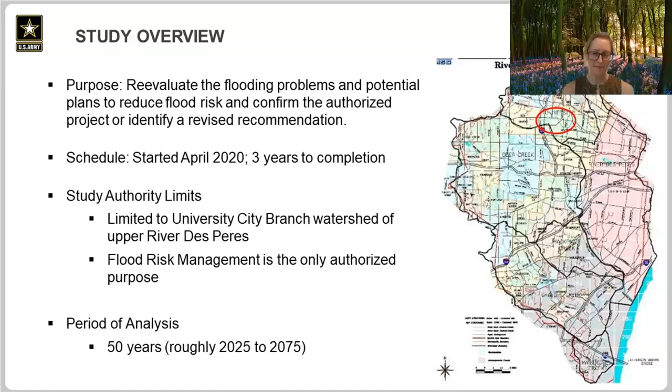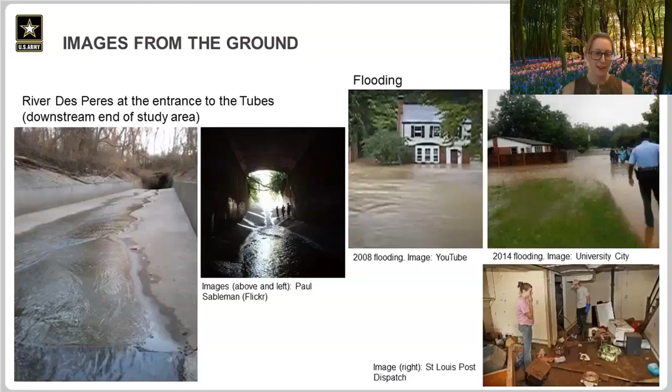I've added some images here. On the left are two pictures of the tubes, the large concrete channel entrance, and then the one that's kind of dark is the interior of that entrance with some people there, so you can see how big it is at that point. And on the right, some images of flooding in University City.

As we all know at this point, there's been significant flooding, several flood events, and I've got those listed on the next slide.

So the problems identified under the study are risks to life safety. That includes direct loss of life, flooding of critical infrastructure such as fire stations and health infrastructure, and flooding of evacuation routes so that people cannot exit from their home or business.

Secondly, economic damage resulting from the flood inundation. That would primarily focus on flooding of structures, so you have damage to the structure and also the contents and vehicles, but that can also include disruption of traffic, emergency costs, and things of that nature.

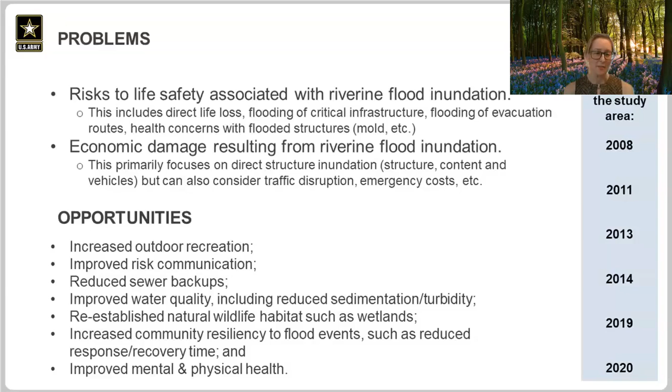The opportunities identified under the study were increased outdoor recreation, improving communication of flood risk to the public, reducing sewer backups, improving water quality, wildlife habitat, community resiliency to flood events such as reduced response and recovery time, and improved mental and physical health. For those opportunities, those are just things where as we go through, we're always trying to find ways to enhance the impact of the study and make it more beneficial.

So the objectives were down to three: reducing life safety risk due to flooding, reducing economic damage due to flooding, and increasing recreational opportunities associated with the flood features.

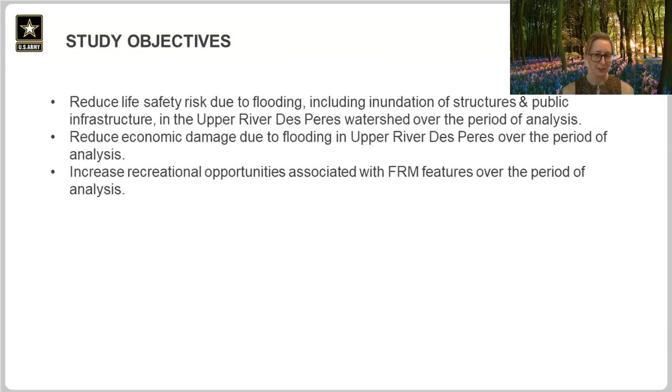We make sure to gather evidence throughout, so when new information comes to light, we continue to incorporate that. And we conduct various types of analysis.

H&H is hydraulic and hydrologic analysis, looking at flood depths and velocities and things like that. Also looking at a structure inventory of what buildings are in the area and their features, life safety risks to people, economic analysis - crunching the numbers on the flood damage - and impacts to cultural resources such as historic structures, including buildings and other structures.

After all those analyses, we create several alternatives, which I'll show you today, and then we select a plan. But of course, at this point, it's just a tentatively selected plan, not the final plan.

So we go through all these steps to get to this point, and then we go out for input, we take comments, and then within the Corps, we also have lots of different review processes outside the St. Louis district so that we get lots of feedback to refine our analyses and kind of go through the circle again and come up with a better plan at the end of it.

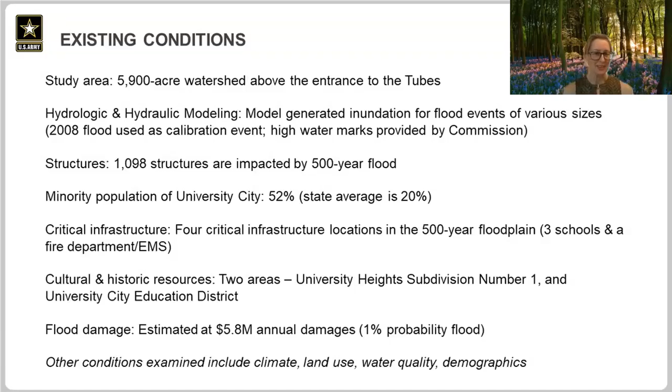So we looked at lots of other things too, and those are all in the draft report, but I didn't want to get too far into the weeds on those today.

So after looking at the existing conditions, we look at the future without project conditions. What would the future be like if we did nothing? That's helpful to compare with any future project that we propose. I've got a few things here, and again I don't think I'll go through all of them, but just to show that we've looked at several different categories and are showing changes that are somewhat significant in some cases, but mostly the watershed is fairly developed already. We're not looking at huge changes in the future, but it's good to compare against.

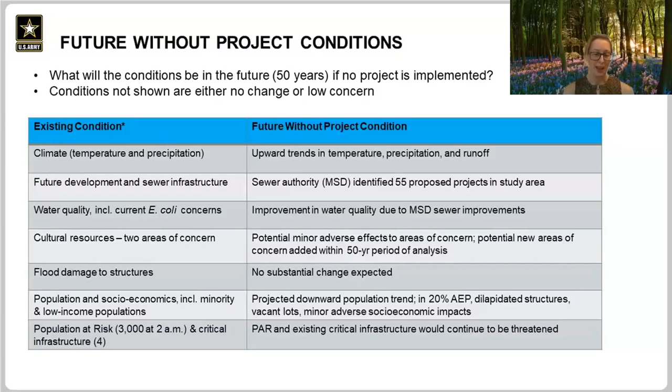Through that screening, 5 measures were removed. Then we got to formulating alternatives, which means pulling measures together in different combinations in a way that makes sense. We looked at 10 different types and screened 4 of those out, leaving us with what's called a final array, a final list of 6 different alternatives. Those are all at a low level of design right now. We start with a low level that's comparable across all the alternatives, so that we can choose correctly between them without sinking too much time, money, and effort into each individual one before knowing too much about it. Then out of those 6 alternatives, 1 tentatively selected plan was chosen.

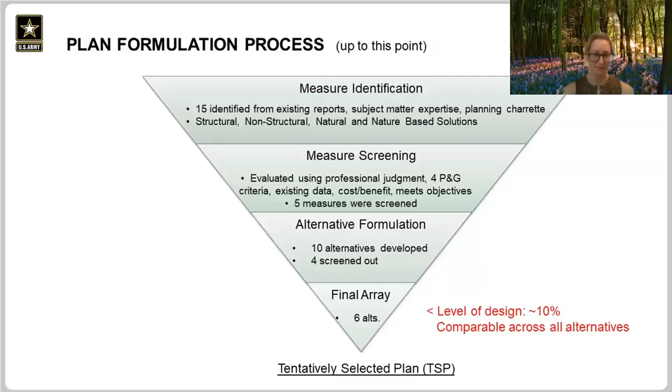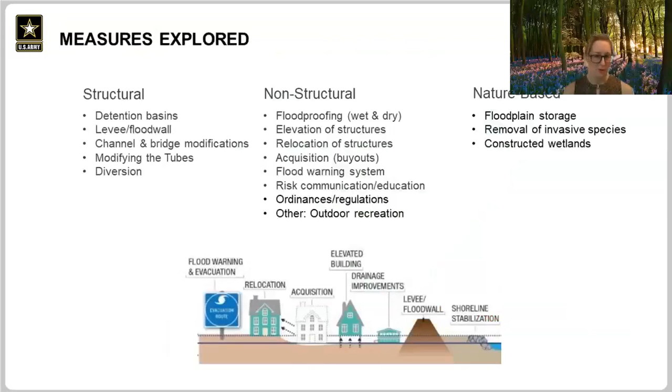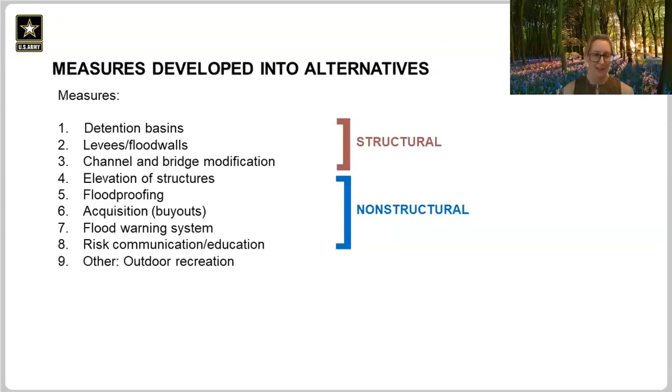So this is our list of measures. I've got a few structural, several non-structural, and a few nature-based. In the end, the nature-based ones were removed, and a couple of the non-structural and structural were removed too, to get to our final list here that were developed into alternatives. So we've got detention basins, levees and floodwalls, channel and bridge modification, elevation of structures, floodproofing, acquisition, a flood warning system, risk communication and education, and then outdoor recreation was considered as well.

Since this is a reevaluation of that 1988 report, we had to look specifically at the measures in that report. There were about 2.5 miles of channel modification, including bridge replacement, bank stabilization, and grade control. Re-looking at those, it was confirmed that the channel changes measure did cause downstream impacts, greater flooding going downstream out of our study area, so that was not acceptable.

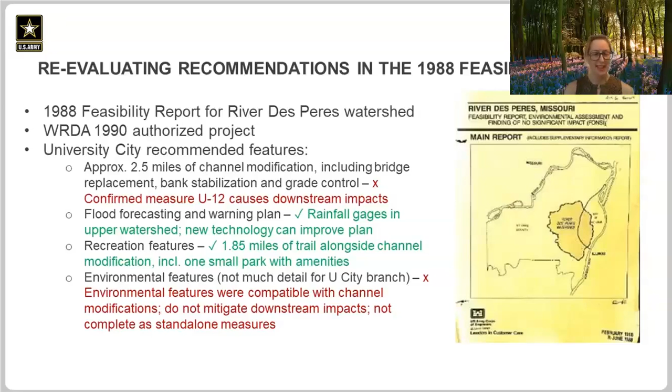The other elements included a flood forecasting and warning plan, which was fine to continue considering, as well as the recreation features. But the environmental features were tied in with the channel modifications and were not complete as a standalone measure, so we deemed those would not be moved forward.

Now I've got a bunch of pictures to give a better sense of what the measures were that we were talking about. For channel modification, this would consist of changes to the channel itself in the river, potentially making it wider or deeper, changing the shape or material, to reduce the flooding issue. The picture on the right is an older installation, a concrete lined channel behind Wilson Avenue, showing what's already been done.

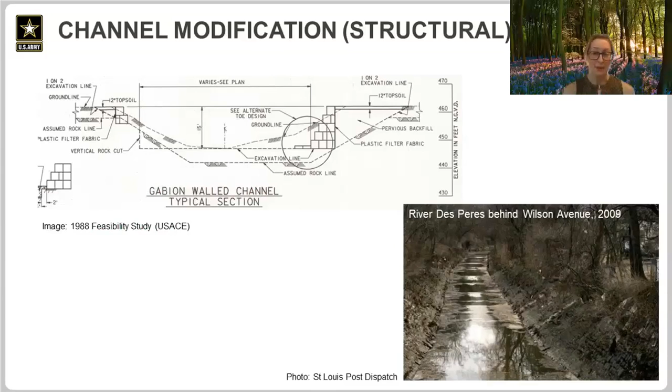Levees and flood walls. Hopefully most folks are familiar with what a levee is: a large earthen embankment where the water stays on one side and an area behind it stays dry. A flood wall is a similar concept, but it's typically a concrete structure which is vertical, takes up much less land footprint, but tends to be a lot more expensive.

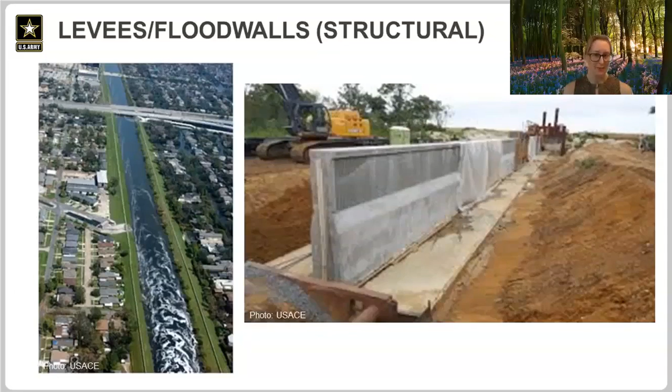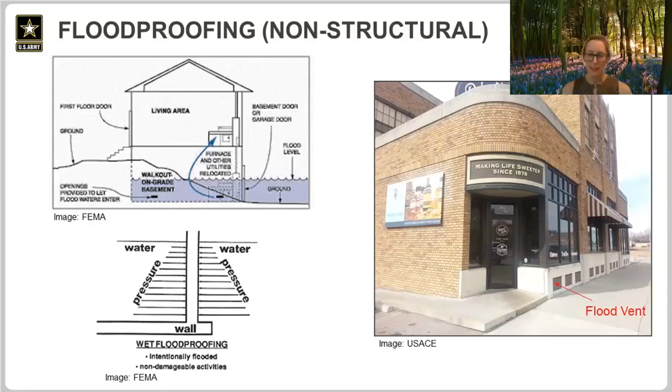For the non-structural items, I'll spend a little more time since we have a lot of detail. For floodproofing, this slide has some wet floodproofing features. The top left shows a diagram of water being allowed into the basement of a structure, that's the wet floodproofing part. Then the utilities have to be raised above the level of the flood, up into the living area, for example. The wet floodproofing will alleviate the hydrostatic pressure on the basement wall, and there's a picture on the right showing a flood vent that lets that water into the lower part of the building.

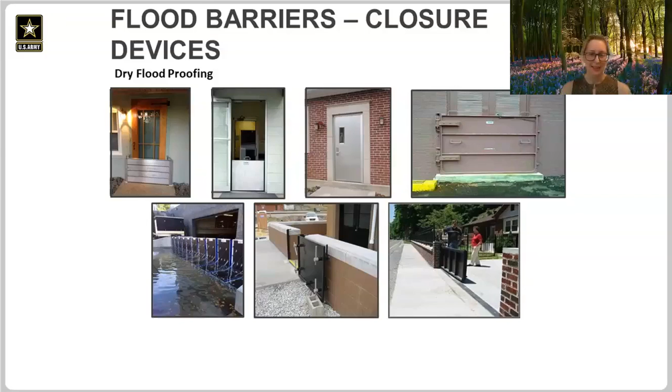There's also dry floodproofing, where a barrier could be put up actively against a doorway or window to keep floodwater out. But we know flooding in this area comes very quickly, so we have concerns about the time it would take to be warned about a flood and then have someone put something in place. So we're generally trying to stay away from active features, but there are possibly some that would be passive. This picture, third from the left on top, is just a doorway that, if kept closed as a matter of course, could be a potential passive dry floodproofing feature.

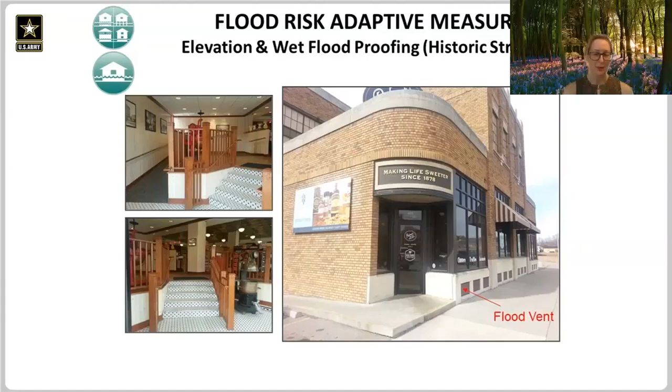One more set of wet floodproofing elements. This is the same building, but on the inside, you can see in the pictures on the left that the interior space has been elevated somewhat, so sensitive woodwork features are all on higher ground now. That can be appropriate for historic structures, to try to salvage and keep those cultural resources above the level of the flood.

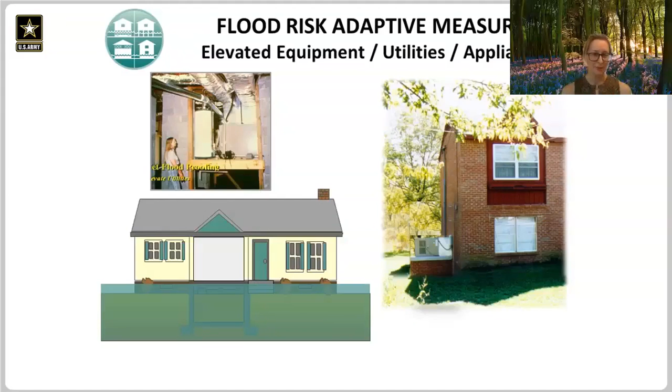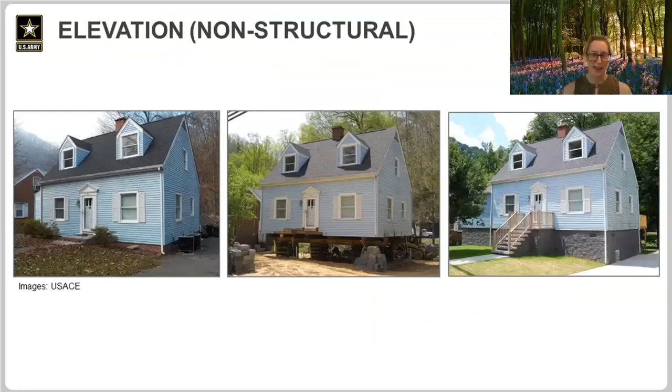Here's a slide showing some options for elevating utilities. It can be done on the interior of the home; the picture on the top left shows the utilities raised within the basement, and the picture on the right shows the utilities raised outside the home on a new additional platform. Then, of course, you can raise the whole building—this is elevation of the whole structure, where a house can be lifted up entirely on its foundation and set upon a higher, different type of foundation.

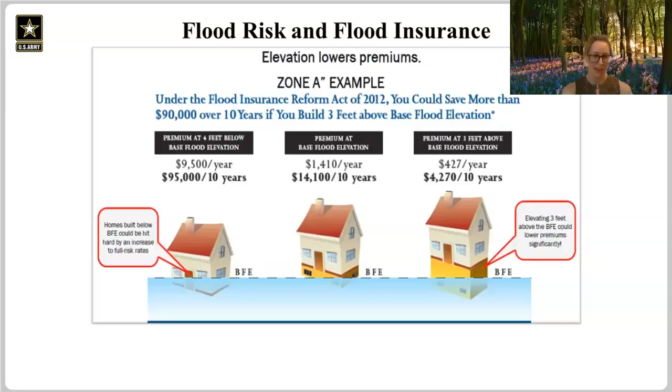Then we have acquisition and buyouts. I know this has been discussed with the city before, and a lot of people are familiar with the Wilson Avenue buyouts of those homes that were repeatedly flooded. The idea is that property that's been repeatedly or severely flooded is acquired by the city, demolished, and turned into open green space that cannot be developed further, so that any flood coming out of the river into that green space isn't causing damage to a structure or its occupants.

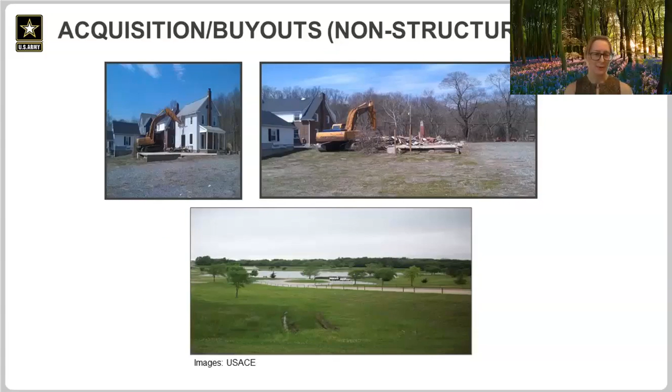The flood warning system is definitely an important feature, and the Commission on Stormwater Issues has been developing a municipal system for University City. I won't say too much since they're still working on it, but they've got a lot of data going into it, including real-time data from rain gauges. There are components that connect that data to the cloud and issue an alarm, and there's a public portal website for that as well.

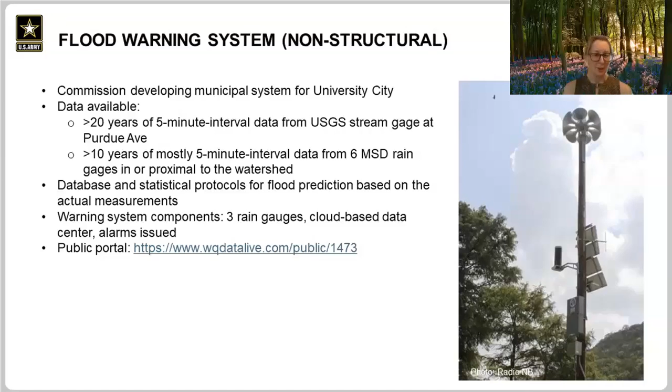Okay, so I know that was a quick run through all of the measures. I want to get to the alternatives now. This is how we got to our final array of 6 alternatives—these are the ones we developed in a little more detail. This one is the authorized plan.

That's the channel modifications from 1988 with modifications. As I mentioned, those channel modifications on their own would create a flood risk downstream of the study area that was not acceptable. So the team added 2 detention basins to help alleviate that flooding. Those are shown here in the graphic, but we'll see them in more detail on the next slide.

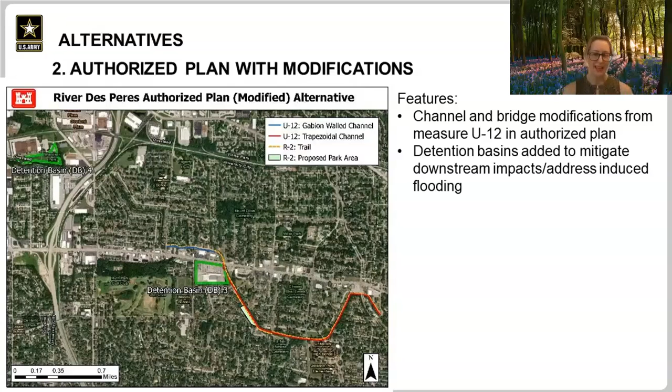For the detention basins on their own, the team looked at 5 sites initially, and 2 of those were determined to be hydraulically feasible—big enough with enough storage to really make a difference on the flood level. The greater effects were present higher upstream in the watershed, and the higher ground provided the greatest storage because you could dig down further and create that storage volume. The 2 locations that moved forward we're calling DB3, Detention Basin 3, and DB4.

DB3 is directly adjacent to Olive Boulevard, at the location of the Seafood City site and that large parking lot. It's about 15 acres in size, and it's a working space—there are businesses there, it's a high traffic area. However, it is high ground, it's a large area, and so it would provide a great deal of benefit. It would reduce the flood a lot.

Then we've got DB4, which is on the left in the graphic, and that's actually outside University City—it's within the city of Overland. It's directly adjacent to the river as well, at the site currently of a dog park at Woodson Road Park. That site is about 9 acres, also kind of high ground, so again it would provide a lot of storage. But because it's not an active business, it's a lot cheaper of a site, so you get more bang for your buck. Both detention basins are dry basins, so they'd be dry most of the time, meaning that when a storm comes in, they have maximum storage.

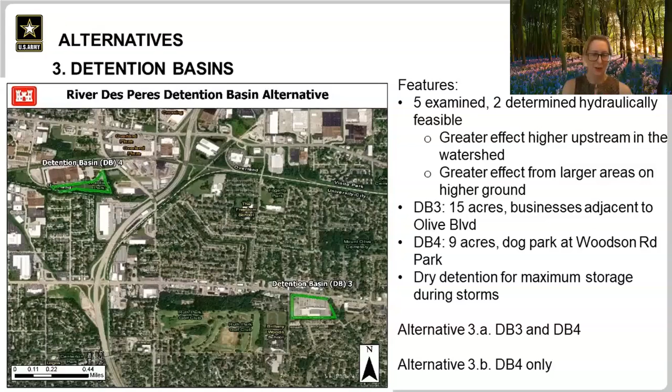So for these detention basins, we looked at 2 options: detention basin 3 and 4 together, and detention basin 4 on its own.

We did look at a levee and flood wall option, and we started by looking at a long stretch along the whole study area, breaking it up in ways that made sense. But for several reasons, it's very hard to find a configuration that really works and isn't interrupted too much in an urban area, so only one made it to the final alternative. This was Reach 2A, and it's mostly flood walls to try and reduce that footprint.

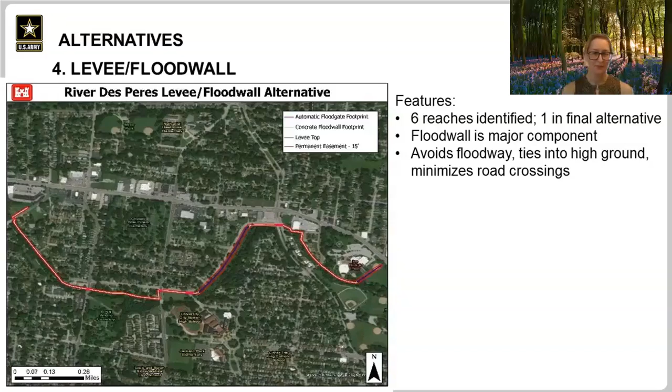Next, we looked at floodproofing and elevation of structures, a combination approach. This covers 500 residential structures in that 25-year floodplain. Most of them would be flood-proofed, and 7 of them would be elevated. We know this would affect historic structures, particularly in the University City Subdivision number 1, which is at the downstream end. Dry floodproofing was used in the analysis, but there's a lot that still needs to be worked out in terms of type of floodproofing and how that's implemented.

Number 7 looks at elevation only. So what if we didn't do any floodproofing and committed to just elevating the homes? This was developed for slightly fewer structures, in the case that no floodproofing was possible. I should also note, with these elevation and floodproofing measures, it's definitely voluntary participation.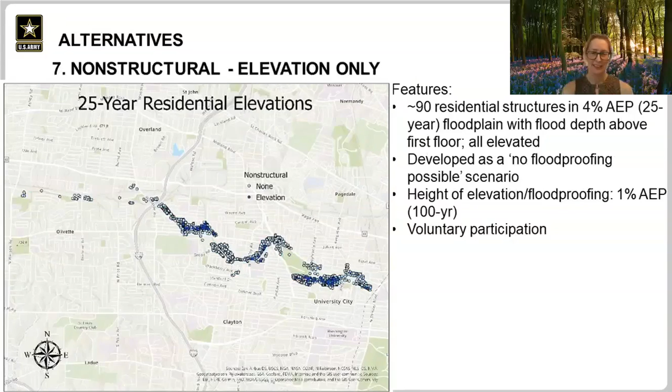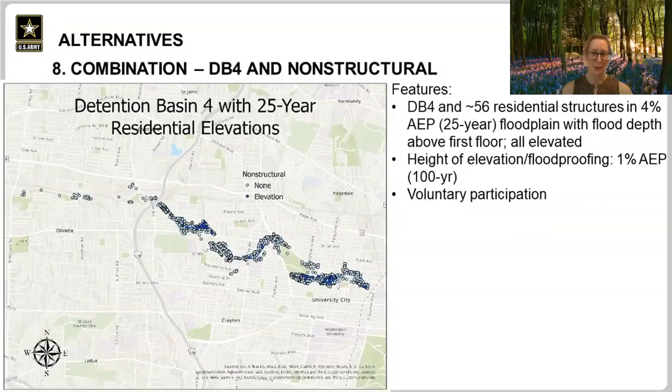And the last one is what would happen if we added Detention Basin 4 to a non-structural solution, where there's elevation and Detention Basin 4. Okay, that was a lot.

Now we're getting to how we evaluated the alternatives. I'll go quickly through this. It's a little dense, but we're required to look at national benefits, economic costs and benefits against each other, and regional economic development benefits, looking at local employment and labor income. We also look at environmental quality, impacts to threatened and endangered species, wetlands, hazardous waste sites, and cultural resources. And last but not least, other social effects, including life safety risk, critical infrastructure protected, socioeconomic consequences, and recreation.

So I've got a big table here, and I want to note again, these slides will be made available along with this presentation on our project website. I know this is a lot of detail tonight, but you can refer back to this as you decide when and how to provide any comments.

This table shows the national costs and benefits. The cost highlighted with the red oval is the one with the highest amount of net annual benefits, meaning the most annual benefit minus annual cost. The one with the highest benefit we refer to as the NED plan, the National Economic Development Plan. So by default, that becomes the front runner as we're looking at the alternatives. But with those four accounts from the previous slide, there's definitely a case to be made in any of the other categories to move forward.

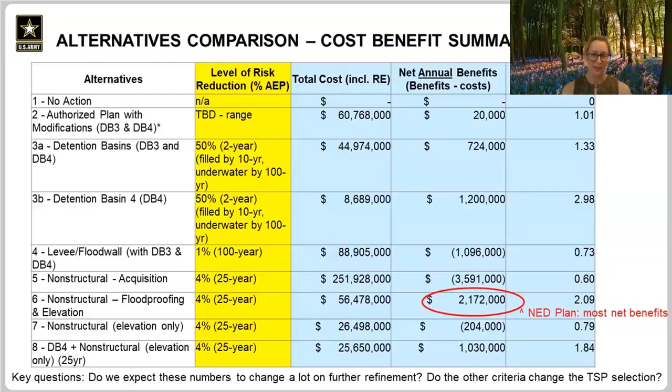So how did we select the tentatively selected plan? Back in May, we looked at those alternatives and selected the NED plan, alternative number 6, which was floodproofing and elevation—entirely voluntary participation by people who want to reduce the impact of flooding on their structure, whether it's their home or business. It had the highest net benefits and the second highest benefit-to-cost ratio. Those numbers are important to the Corps of Engineers so we can justify it up the chain and get it funded. They like to see a nice, healthy amount of benefits for a project that really provides flood risk management. So that's the one we went with—that is the tentatively selected plan.

The draft report, made available today on our website, provides details on the planning process—how we went through the whole process—and more details on all of the measures and alternatives and how those were developed. I've got a big yellow box here because, as I've said and will continue to say, the TSP will be further refined in the next stage of the study. If it's refined further and changes are made, but the city still doesn't find it acceptable for any number of reasons, a locally preferred plan can be chosen instead. The plan does have to have high enough net benefits and a high enough benefit-to-cost ratio that we can justify it, but there's a whole range of things that can be done.

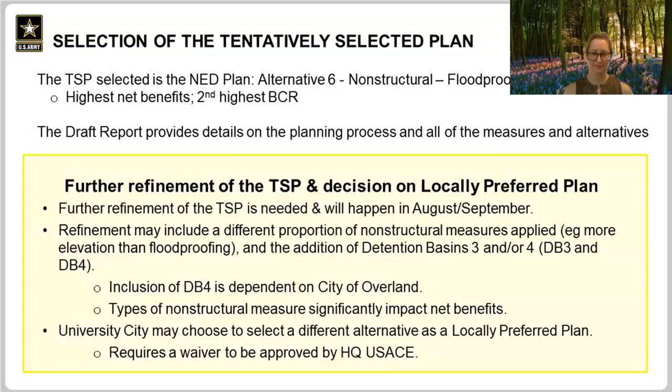Well, I don't have anything else to add. Okay, oh, is that a hand from Mr. Cusick? Go ahead. Thank you, Janet.

Before this meeting ends, Sinan, would you be able to give just a very brief explanation of the early warning system? After yesterday's rain event, could you let those people listening in know the status of our early warning system that Janet spoke about earlier?

And then, Janet, what I would like to ask you is, for those people that would like to make comments, what do you want them to comment on? What do you want them to say? What do you want to hear from people? Do you want to hear people say yes, we like detention basins, no we don't, yes we're in favor of flood-proofing methods, or no we don't. We don't want an unsightly wall down through the middle of University City to be used as a flood wall.

Specifically, what is it that residents can provide you with? Do you want information on their flooding, how often they're flooded, or where they live and if they're flooded? So could you be a little more specific on how residents could help us out with it?

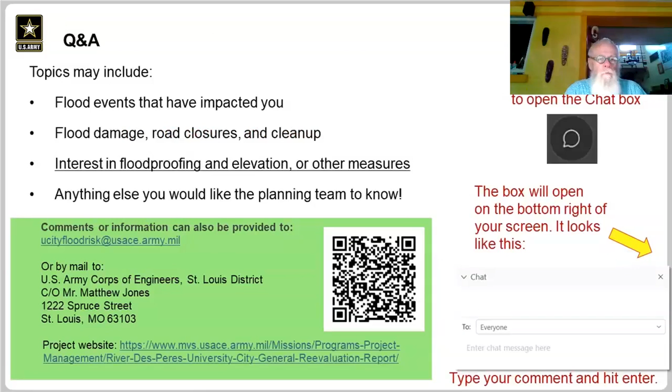Sure, that's a great question. I flipped to the next slide because I had a couple of prompts here. In theory, the public comment can include anything that the public wants us to know. And so yes, that will definitely include flood events that have impacted you. What did they look like? How often has it happened? If you're comfortable sharing your address, where did it happen? We would be very interested to know that, so that we're aware of what has actually been happening.

Flood damage, road closures, cleanup, actual negative impacts of flooding, along with dates if anyone has dates of when those things happened. I know those can stick in the mind. And then I've underlined this third point, interest in floodproofing, elevation, or other measures. So if you've seen anything that you really like in those alternatives, let us know. If there's something that you really don't like or you have serious concerns about, let us know. Really any kind of gauge of what these options have sparked for you as to what you think would work well in the community. We'd be very interested to know that.

And I might pass the mic to Matt Jones in case I'm missing something as a prompt for public input. So Matt, did you have anything that you would add to ask for specifically? Yeah, thanks Janet. I would definitely agree with everything that you said, and I would also add, if there's something that motivates the public and that's really what they want, we would really like to know that. So for example, if all of the residents are concerned about reducing their flood insurance or potential flood insurance, that's really important because that lets the city know, and the commission know, and then us know that we need to really use measures and identify measures that will do that, because not all of them will do that. So I think knowing what really is important to the public is important for our study process, as well as for the elected leaders who will ultimately have to make decisions about whether we move forward or not.

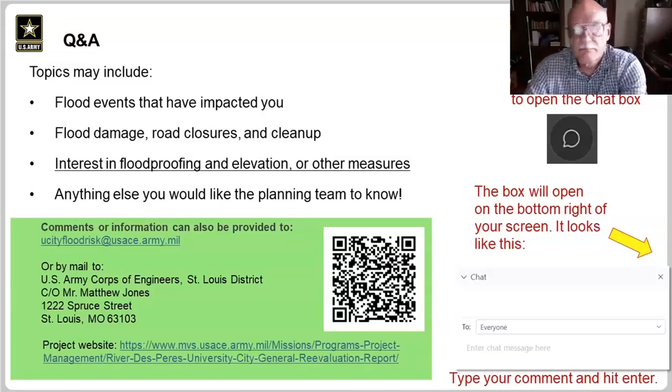So the next question, Sinan, this might be something you wanted to address: what has been the investment or total expenditures made by the City of University City, directly or indirectly, to the Army Corps of Engineers? The Army Corps of Engineers' proposal fee for this study is $650,000, and that has been fully paid at this point, which will take us through completion of the study. That is funded by MSD's operations, maintenance, and construction improvements funding in our community, so we get reimbursement for that expenditure from MSD. Additional staff time, commission's time, and our council's time are additional investments into this undertaking.

Yeah, for sure, Sinan. Just to build on that and explain what it looks like in the grand scheme of things: the $650,000 you referenced gets us to a complete feasibility study, and within that feasibility study are some preliminary construction costs. Once the feasibility report is finished and goes through all its approvals through the higher level Corps of Engineers, assuming that gets approved, then we put in a request to Congress for additional construction funds. We then enter into an agreement with the city whereby we build the project, cost-shared between the Corps' federal dollars and University City's dollars, or however the city chooses to get those funds. I just wanted to add that overview of the process.

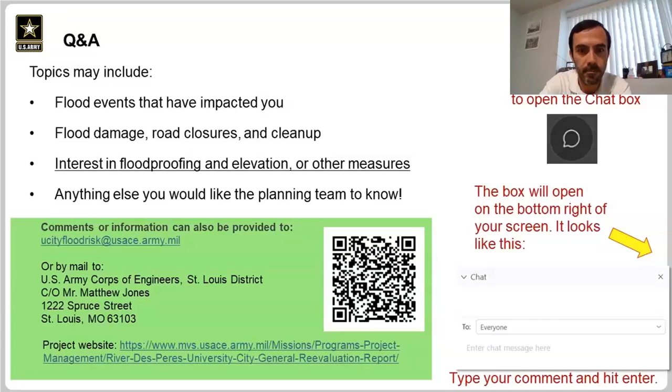Alrighty, the next question was: have you completed studies above the University City watershed that flow into University City? Doesn't that have a big bearing on what our plan would be or should be?

Yeah, I'll take that one. Clicking on the study area slide again, the watershed boundary, like I mentioned, is this red line. It does extend up into Olivette and Overland, but it's just this area, the upper headwaters of the river. The green dot on the left side of the screen marks the 800 CFS threshold. By statute, we're required to cut off looking at waters that are too small, and that's the cutoff point, the upper end of what we're looking at. I just wanted to show that this map represents the upper end, so we're looking all the way up to that green dot and the drainage area there.

I'm not familiar with any other studies that have happened before now in that area. As I say, it's the upper headwaters, so the tributaries are all pretty small, and there's no studies available above that point. So that's the short answer.

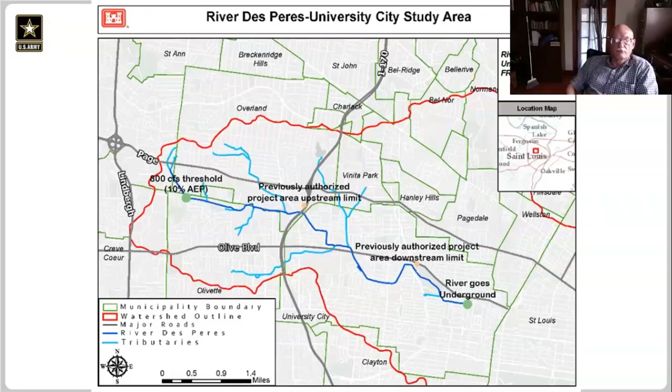Okay, thanks Janet. There was another follow-up question to my funding response to myself and Sinan, so I wanted to touch on that really quick. How are we planning on paying for the construction, or will it cost us more money? Can you give an idea of the cost share for other municipalities?

So for this particular project, if it were to move to construction, construction costs would be cost shared 65% federal and 35% non-federal. The actual dollar amount would depend on what the ultimate recommended plan moving forward is, whether that's the LPP, the current TSP, or any variation. I just wanted to provide that - that is the cost share. It's pretty typical with these flood risk management studies, where 65% is the burden on the federal government and 35% on the non-federal sponsor.

As to how University City would pay for that, that's not something that I can answer. But Sinan, I don't know if you wanted to touch on that at all, any kind of revenue source for construction on the city side of things.

Not determined so far, but we're anxiously awaiting the results from this study. And however, 65% federal participation is, I believe, a good way to leverage our local funds for a construction project that can address some of the flooding issues in our community.

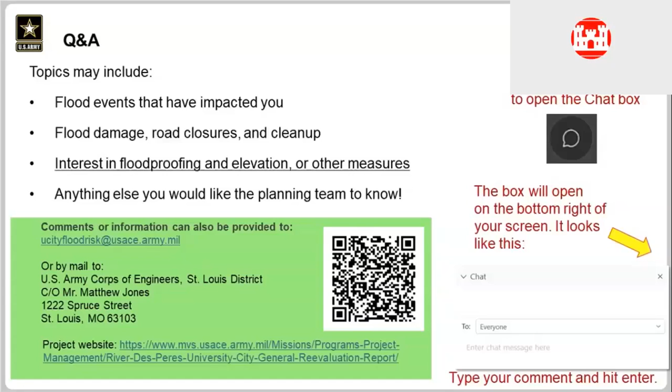Janet, I'm not sure if you're able to answer that, because I'm not aware of the MSD tanks, but if you don't, maybe Sinan could jump in, or someone from the commission. Well, I'll start by saying - go ahead, Sinan, go ahead.

Sorry, Janet. The proposal came to University City a while back, and there was a location considered for it, and they collected public input. Based on my memory, it was a proposal that was withdrawn by MSD at the time. As I understand it, it's geared toward solving combined sewer overflows into the River Des Peres. MSD is under a consent decree to solve those issues in their service area, which includes University City. What MSD committed to after that exercise was to bring this back to their drawing board and come up with a comprehensive solution, as they called it, and bring that forward.

We checked with MSD about six months ago or so - was that proposal ready? And it wasn't ready at the time. So since then, we haven't heard back about another proposal being ready to be considered.

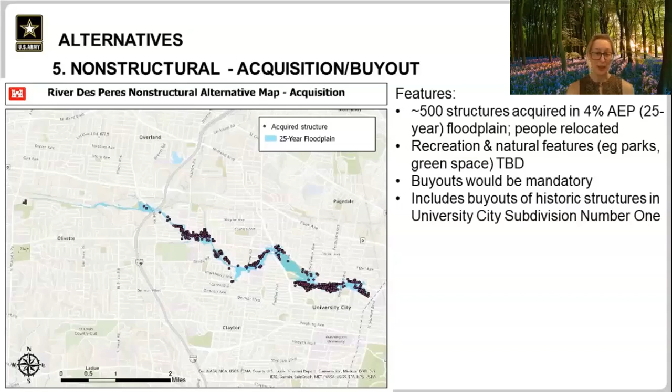The next question was about how many houses are projected to be in a possible buyout area. I'll go back to a slide that showed a whole bunch of houses that were assessed. If all of these structures that were assessed to have damage during the 25-year flood, that would be approximately 500. That was just an analysis used to move forward with the numbers and see what that would look like. Again, this would not be a final solution. And in fact, the numbers, the net benefits and the benefit-to-cost ratio showed that this would be a lot more expensive for less benefit compared with the floodproofing and elevation of structures.

So as of right now, we're not looking at buyouts as a competitive solution. I will say that as we further refine the tentatively selected plan, there may be some structures that are severely, repeatedly flooded, and if the owners in particular are saying we really would like to move away, this is not working for us, we would not like to try and elevate or floodproof — maybe geographically it's more of an isolated location and it's hard to get out and evacuate — then that's definitely still an option to have smaller amounts of acquisition. But as of right now, a large buyout area is not a front runner in the planning process.

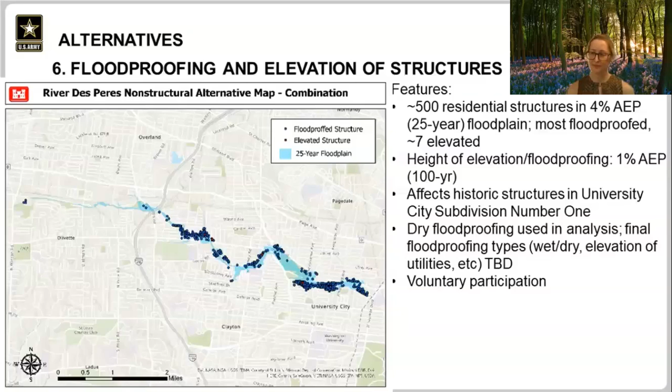Thanks, Janet. The next question is also on the theme of buyouts: will buyout houses be taken off the tax rolls, and what is the impact to city property tax revenues? I think I can take this one, not speaking on behalf of the city, of course, but I think that's a good point — when you buy out houses and put easements on that land that doesn't allow homes to be rebuilt, that would definitely impact the city's tax revenues, and that's a choice the city has to make based on its citizens' feedback. So it definitely would have an impact, but again, if we don't have any buyouts that are part of the plan, then there wouldn't necessarily be any impacts.

The next question is, are these retention basins similar in design and location to the ones proposed by MSD? Yeah, so I might pass the mic over to Jeff Reepe from MSD. Fortunately, we've been in contact, so he's seen these basins take shape in our planning process. I'm not too familiar with the ones MSD had planned, only that there was a location that was similar. So, Jeff? Yeah, so the basins the Corps has proposed — one of them is in a similar location to what MSD had originally considered, which I believe is the Seafood City site that was discussed earlier.

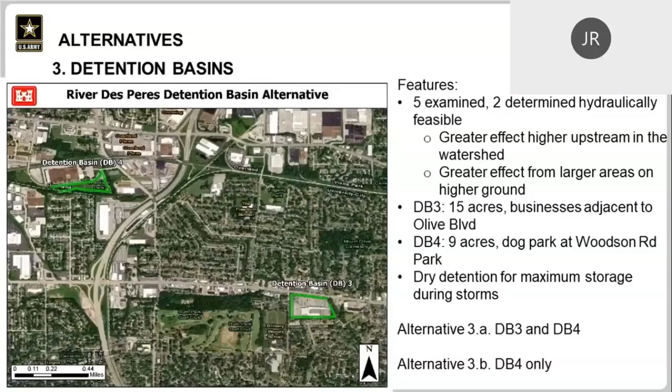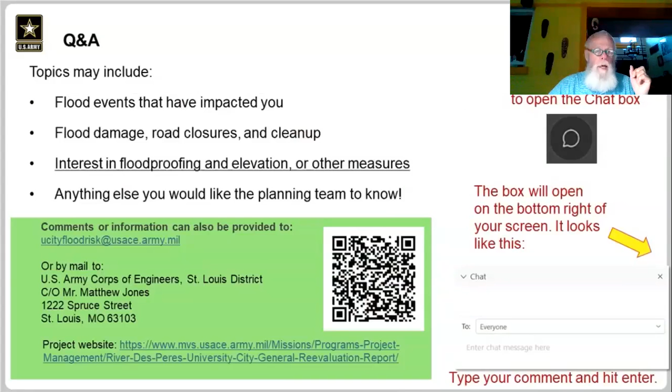Matt or Janet, may I ask something? Yeah, absolutely. It's my understanding that the detention basins are more like an open depression in the ground, not a container. My understanding is that the MSD project involved actual storage containers, not open ground areas. Is that what the detention basins you're proposing are — just open areas?

That is correct. I think they looked at multiple different kinds of configurations of whether the water would be pumped into the tank. I think maybe what MSD was looking at is probably better referenced as a tank versus a basin, and maybe if we use that terminology, that would help clarify.

The idea for the MSD basins was to store excess water that was in the sewer system. That water would be taken out of the sewer system and stored, which would reduce the amount of backups, or how much water was in the downstream system, allowing more capacity down there. And then after the storm event was over, that water would slowly be metered back into the system at a rate that would not cause any issues or problems.

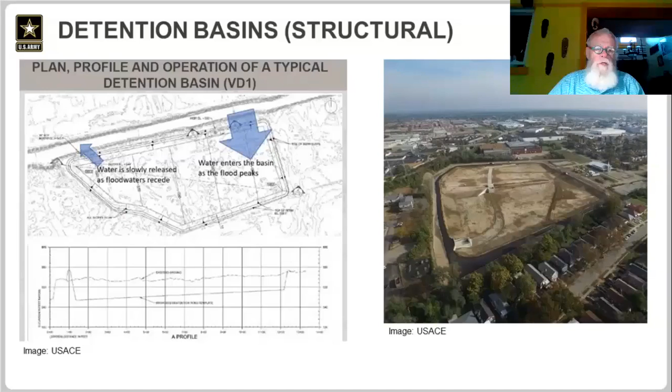Thank you for that clarification. Certainly. How many acre feet of storage are in these two proposed basins?

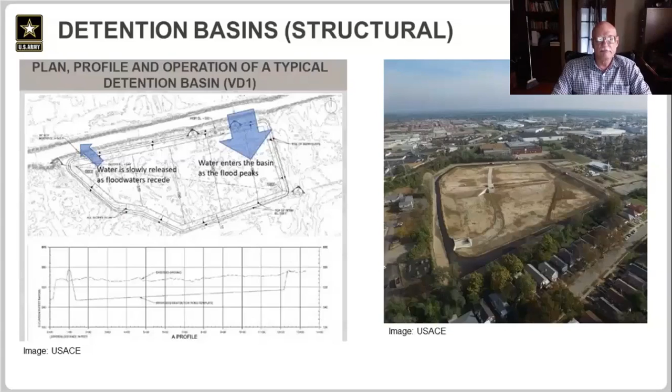I'm afraid I don't know how many acre feet off the top of my head, only the acreage on the land surface of 15 acres and 9 acres. We do have our hydrologist on the call, as I believe. If I can check on the list here, he may have had to drop off. Oh, no, it looks like he's on, Janet. Okay, yeah, Joel, are you out there?

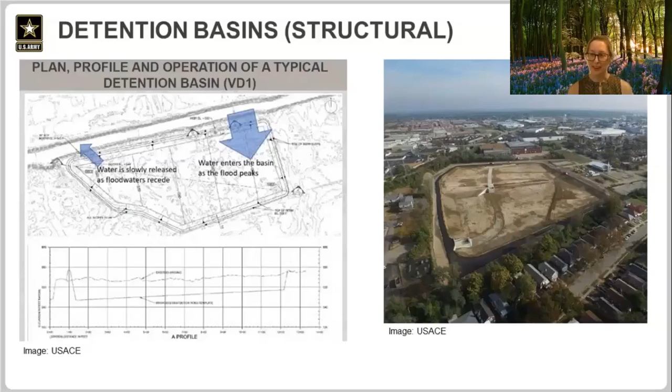Hi, Janet. It's Joel. Yeah, hi, I'm Joel Asensis, I'm the hydraulic engineer on it. Dr. Chris, the question's kind of difficult to answer because there's an impact all the way up through the 500-year event. So really, the best way to look at it is the bigger the area of the basin, the better it'll be. As far as digging down, we'll dig down as far as we possibly can to get as close to the utilities as we can to maximize that storage. But that's kind of the whole design process with this.

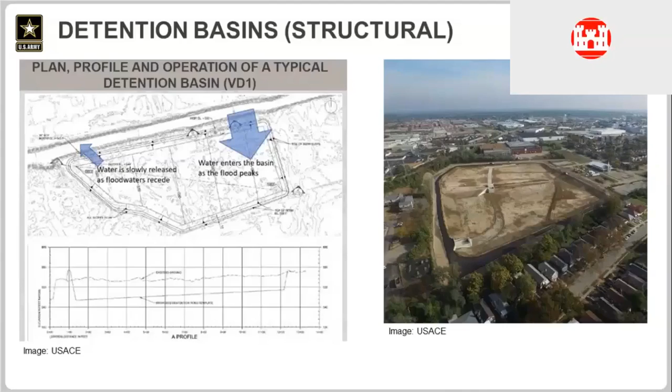Thanks, Joel. Okay, and then the next question has to do, Janet, with I believe it's slide 40, and it was to explain the graph percentages on the axis. I think it was just the participation graphs. Can you go a little bit more into what those percentages mean, Janet?

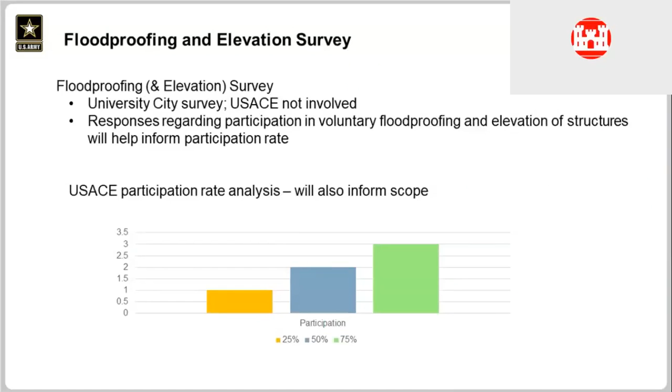Sure, and I will be honest with all of you, this was my attempt to add a little excitement to this slide, so it depends on how you define excitement. But I wanted to show basically the Corps of Engineers participation rate analysis. On our side of things, we'll be looking at what would happen if 25% of structure owners participated in floodproofing and elevation. That's orange, and 50% with the blue, and then 75% with the green. So once we run all of those three different sets of numbers, we can see the range of possible outcomes.

And so if we end up having very low participation, at least we've accounted for that, we can tell that the project is or is not still viable if there's not very much interest, or if there's a lot of interest in that 75%. It just helps us cover the bases and understand the range of possible outcomes and range of possible cost commitments as well. So hopefully that's a little bit clearer, but I just thought I'd throw some numbers and some colors on there to show our participation analysis.

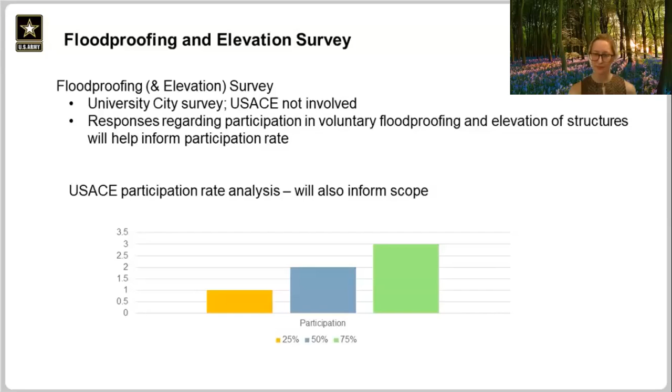Yeah, thanks for that, Janet. I do think it made the slide better, for sure. So the next question is, what do you consider successful public participation? We're a city of 35,000. What is considered realistic, substantial, and meaningful?

I think I can take a stab at it first. So I don't know that we can answer, air quotes, successful public participation. What I can say is that I think in this particular project, we've been on more public meetings and on more public meeting agendas than any other project that I've really been a part of. So we've been on open agendas for both the Stormwater Commission as well as the City Council a couple of different times, as well as hosting our own public meeting before, and then the one tonight, and then, of course, the one we're going to host hopefully next week because of the issues tonight.

So I don't know, Janet, if you wanted to give your side of what successful public participation is, but I definitely would look to receive several emails in the next couple of days, couple of weeks. And I think if we do, then that will be a really good start. But what do you think, Janet?

Yeah, I think that's a great definition and place to start. I haven't been on too many of these, but I would say that meaningful engagement is the main thing we would look for to be successful. So people contacting us about flooding issues, bringing us information we may or may not know, even if you think we might know something already, let us know anyway, because we might not, or we may just really appreciate the confirmation of knowing what the flood impact has looked like to you.

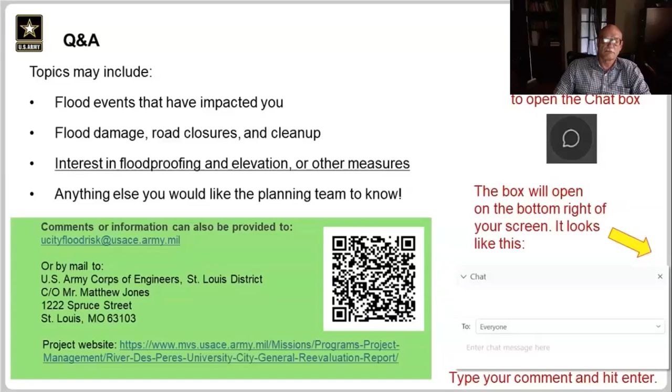I think there's one other question that was a private question, but I think it could be worthy of an answer. So shouldn't the Army Corps and MSD get on the same page before a final report or decision is made? I think I can take a stab at the question first, and that is that our non-federal sponsor is the City of University City, but of course MSD is a stakeholder. The public is a stakeholder. The commission is a stakeholder as well as a technical expertise group.

So yeah, I think that as we move forward with this draft report, which is what's being released tonight, and we kind of further refine the TSP, as Janet, you were talking about, we definitely do want to get on the same page, and that's what we're hoping to do somewhere in that September-ish timeframe, late September timeframe, so that everybody feels comfortable with the decisions that are made, and there is ample time for public comment to be included. But yeah, so there really has to be an agreement between the Corps and the city as our non-federal sponsor before a final report or decision is made.

So that's kind of a requirement to move forward. And the study process as well, of course, is like a funding partnership. So, Janet, did you want to add anything on that, or did I cover it okay? I think you covered it. Thanks, Matt.